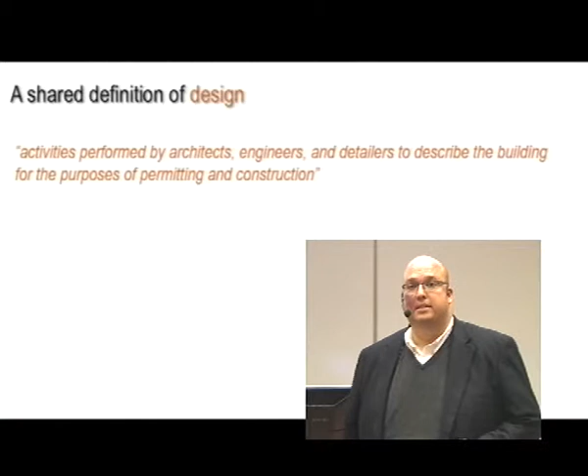One of the first things that will strike someone when they join an integrated project, or when they work in a big room for the first time, is how alien the environment can be. What we find most often is that this only goes away when people stop thinking about the company they work for and embrace this new organization that has been assembled for the purpose of designing and constructing a building. So the way to get around that is to think about the big room and the integrated project as its own organization.

And in the way that you would set up your own organization, you have to think about how we will work together, how people will treat each other, how do you behave. Some offices are boisterous and rowdy, other offices are like sitting in a library. And those people all come together at the same time and are expected to produce something under tremendous pressure and to perform successfully. So it asks for a lot - this can be very challenging, very much so.

It's easy to overlook things like coffee. You have something you take for granted, like a refrigerator with drinks and snacks, and then you go to work in this new environment and it isn't there for you. That's part of your routine, that's how you get your work done effectively. So it's important to consider and discuss things that in a typical project you would never discuss.

While most of us as architects have a rough idea that one material may cost more than another, or that one process, because it's more complicated, will be less cost effective because it takes more labor to install, we don't really have a dollar or euro sense of how much something actually costs to put in place. And it's only once we have that cost information that we can answer the value proposition put forth in the criteria from the owner.

It would be nice to provide everything the owner asks for in the way that we want to, but it's very unlikely that those solutions can fit within the project budget.

So within that, when the contractor provides cost information, the estimate really should tie into the building information model. And with that, I mean not just that there's a BIM model that the contractor can look at, but that you design with components within the model that can be used for detailed takeoffs.

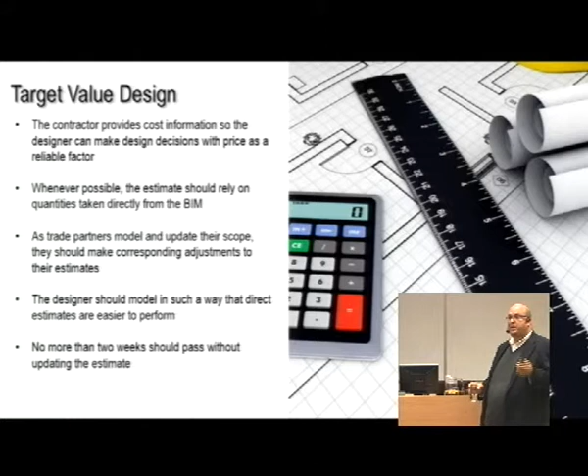If you have 150 chairs, then it should link to the estimate with the cost of 150 chairs, or 200 fire smoke dampers, or 300 square meters of carpet, or whatever it may be. So the idea is not only for the contractor to pull that information in a logical way, but for the architect and engineer to design in a way that enables the estimating to take place.

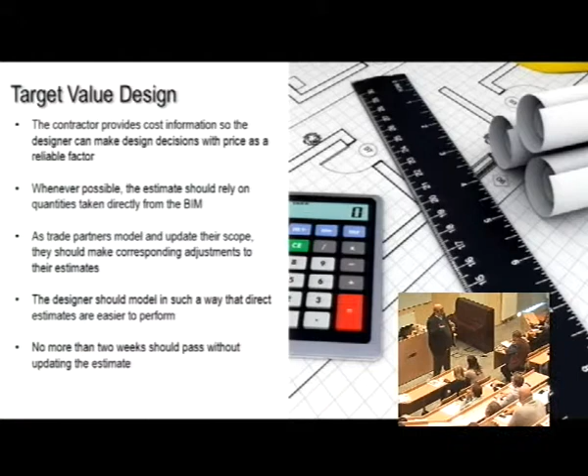In the IPD setting, I would say on my current project in San Francisco, more than half of the drawings are produced by construction detailers. Our mechanical system is being drawn by the detailers who will then fabricate that mechanical system and put that ductwork and plumbing in place within the building itself.

Most of those people who are construction detailers are in their 40s or 50s and have, before that, 10 to 15 to 20 years of experience in the field installing the things that we as designers have drawn. You can imagine they have some opinions about how to better draw things so they can actually install them. What's powerful here is that we can leverage their real world experience to better inform our drawings.

We have something, the way we categorize drawings or the activity of work, called means and methods, that the contractor uses. For them, it represents not just the way they put work in place, but the way they've figured out to do so efficiently. For them, it often represents a competitive advantage. So we, as a design team, need to learn to use that to help prepare documents that show the means and methods the contractor will employ to put the work in place.

We'll come into that a little more later in the presentation.

That's also a piece of target value design, in that as these changes are made, the detailers are able to provide information back to their office to update the estimate, and that estimate is then refreshed for the team. It should occur no less frequently than every two weeks, so that we're always working with current cost information, thereby ensuring the value for the owner.

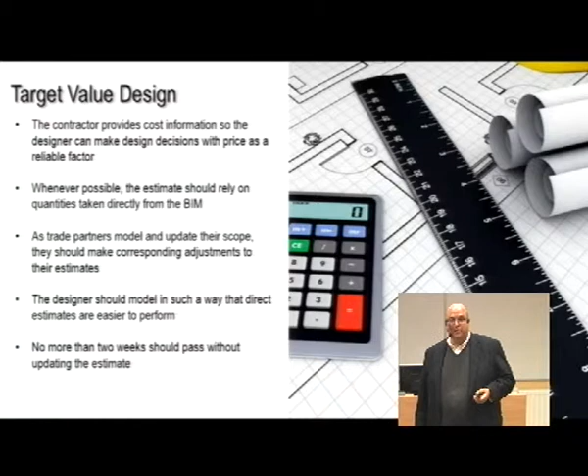So I jumped the gun on this a little bit. The idea of the builder as subject matter expert.

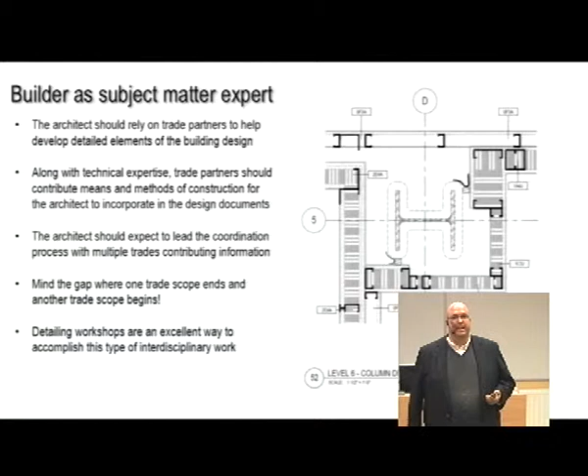I've been practicing architecture for nearly 20 years, and I learned as much as I possibly could about how to frame walls using metal studs. It's something I'm interested in, I've always liked it, I love drawing the details. I spent about an hour with a gentleman named Roger, who had worked in the field for 30 years as a framer, and it was clear to me he had forgotten more about framing than I would ever know. So the thing that architects and designers must learn when working with craftspersons from the field is that they have a phenomenal wealth of knowledge about how to put buildings together.

This isn't a detail we simply drew, this is actually a live cut of our BIM model. We have the structural model that came from our steel fabricator, and we ourselves drew the partitions, but only drew the gypsum wallboard on the exterior. The trade partner, the framer, went in and on our project placed every single metal stud, not in a random manner, but in the way they intend to build it in the field. So what we actually did was give them control of our partitions early on in the design process so they could move the walls around, substitute different studs and wall thicknesses, etc., and design each of these details the way they would build it.

Normally, I would draw a column detail, in this case with the rated partition that comes into it, in a generic way, and submit that to the reviewing agency so they could permit that particular detail. It would pass, but it would mean absolutely nothing to the person in the field who was going to build it. They would completely alter the way it was put together, and it would pass inspection, but it would have unintended consequences on the layout of the room. Because with the column, if I design it tight against the column and then it moves further into the room, it's going to cause problems with my room layout.

So the way to get around that for our team is for the people to be part of the process from the very beginning, so their means and methods are part of the way we draw and describe the building. With this, in some ways, architects struggle because it's taking away something we normally do and probably thought we were good at doing. As it turns out, we were not. But we still have a very important role of coordinating these trades as they come together to work.

A great way to do this is to work in a detailing workshop, taking the columns, the skin of the building, areas where a number of trades come together and where you have critical details. You don't want water to penetrate the building, you need a rating to make its way successfully through a floor plan. You really work together to develop how those pieces will actually be assembled in the field and successfully meet the design intent.

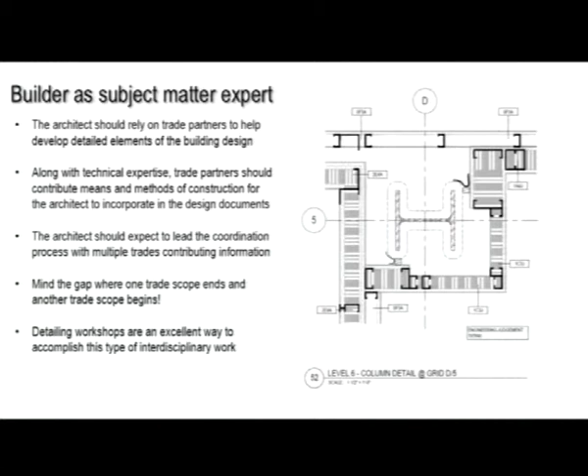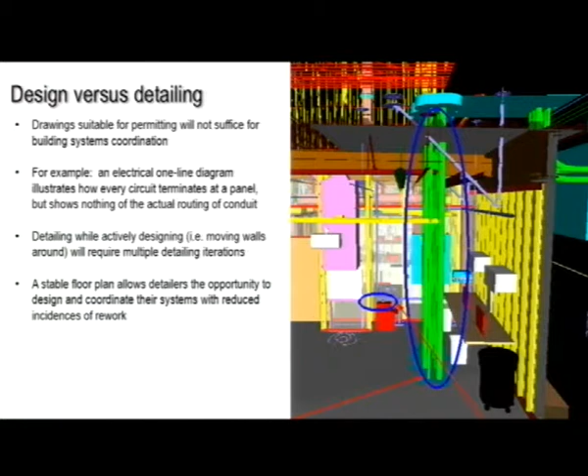This has proven to be the biggest challenge on our project. The distinction between design and detailing was one that I personally did not give enough respect to when we began the project. The detailers work in a very specific way to produce shop drawings to install a particular scope of work. They will detail down to the level of pipe fittings, conduit fittings, boxes, all kinds of very detailed things that accurately reflect exactly what will be put in place in the field.

It's very difficult for design and detailing to occur at the same time. A small move for me, shifting a wall maybe half a meter to one side, is potentially disastrous for the detailing effort that has gone on in that area, because it may shift the partition so that it now aligns with a beam, or aligns with a sprinkler main line, or runs into a zone valve box or something like that. So one lesson we learned was that we needed to finish moving around doors and windows and walls before we released work on a particular floor for detailing.

I was also of the opinion at one point that if I think of the project as a whole, wouldn't it be more efficient to simply pay the detailers to keep changing their work? And yet I've come to believe that's also perhaps not the best way to go. Not because of the money, but because of the impact on them as workers. To draw something and then have to discard most of it, and then draw it again and have to discard a portion of that again, is psychologically very difficult at times. It goes back to that first idea about the way you treat the people who work in the big room together.

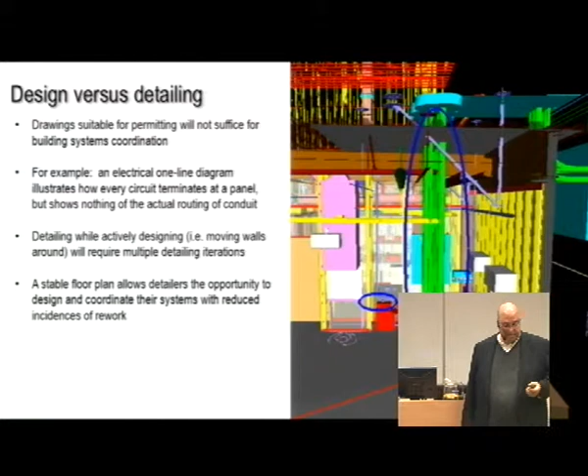Another ingredient for success within an integrated project team and within a big room is the idea of shared business interests. The key word here is transparency. When you work in an IPD team, at least in the ones I've worked in, everything you do from a business perspective is transparent to the rest of the team.

The number of people that you propose to bring to the project, how much they get paid, how long they're going to work on the project, what activities they're going to do, and with that, higher level measures of how much you will spend each month to accomplish the work through the lifetime of the project.

There have been a number of IFOA projects—IFOA stands for Integrated Form of Agreement, a contracting method used by my client—that started very well and went along nearly to the end and then suddenly ran out of money. And nobody saw it coming. No one had any idea the project was unhealthy when everything seemed to be going so well.